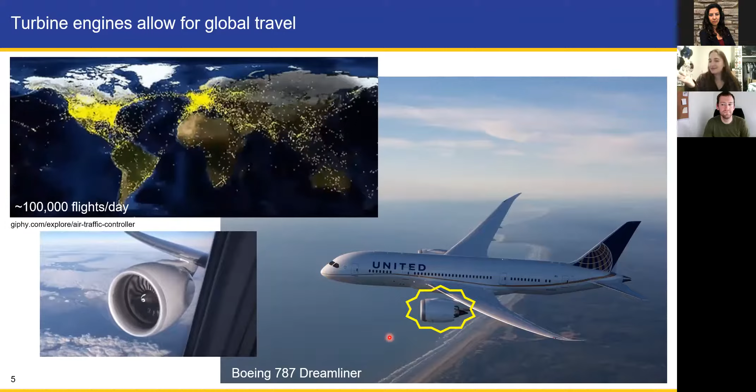What we'll really talk about is this amazing machine called the turbine engine. I first want to talk about how it works, because material science often focuses, especially on these applications, on very small parts within a larger system. So I usually talk to my family and people about what I do, and I start with the turbine engine.

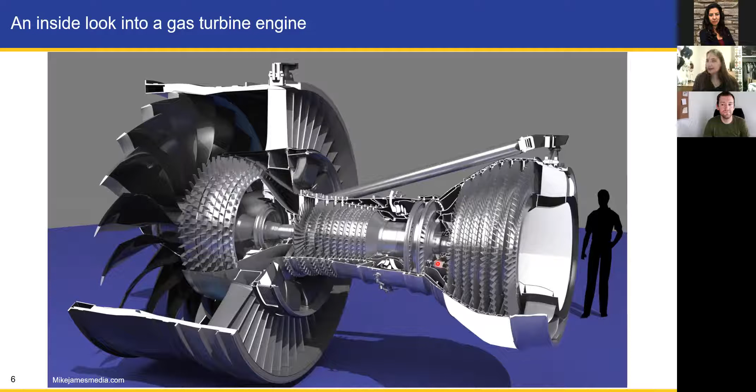So let's take a look at the inside of a turbine engine. Here's a person for reference. We're going to break down how it works just because I think it's really interesting. I focus on materials towards the back of the engine here. You can see there's lots of components that are very complex inside this engine. So if we take this and expand it so we can talk about each part of the turbine engine...

The first is the main fan, and the fan blades suck in air from the environment. The air can bypass the core, which consists of the rest of these components, or it can go through the core. The air coming through the main fan provides most of the thrust that's needed to get you up in the air.

The air that gets through the core first goes through the compressors, and it's squeezed as it passes through the low pressure compressor and into the high pressure compressor. Then it enters the combustor where the compressed air is combined with jet fuel and you get a combustion process. And finally, hot exhaust gases blow out the back of the engine.

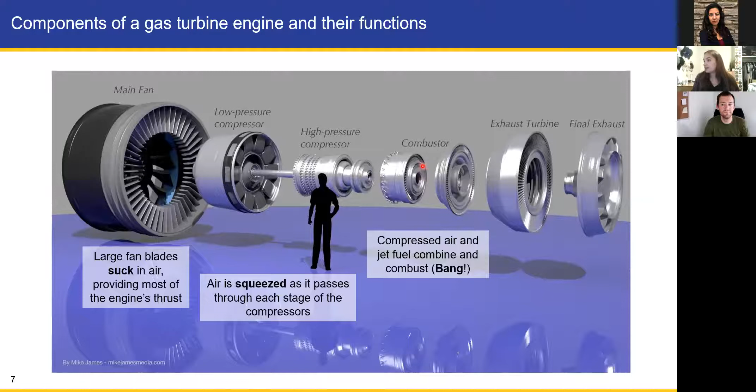And the hot gases cause these turbines to spin. Everything is connected to one axis. So as these turbines spin, it allows the front main fan to spin and suck in more air, and the whole process repeats itself. So the materials problem that I focus on is the high temperature materials in the turbine section of the engine.

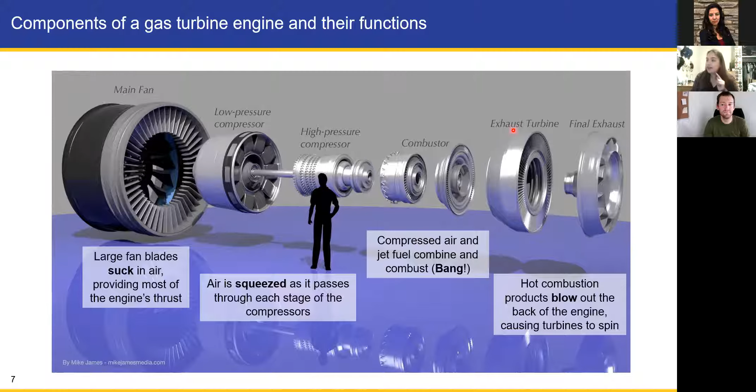So in terms of material science, I focus on three main considerations for material choice in these turbine engines: thermal, mechanical, and chemical configuration environments.

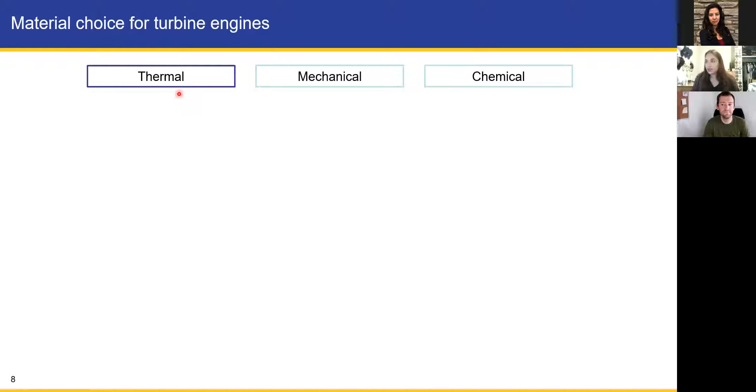So let's start with thermal. We can go back to basic chemistry and talk about bonding. Each type of material has different types of bonding that holds it together. Ceramics often have the strongest bonds, covalent or ionic bonds, where ionic bonding is most popular in ceramic materials. Think about sodium chloride. Metals have metallic bonds, which are the second strongest, and polymer chains are connected with these weaker van der Waals bonds.

So in terms of temperature capability, the materials with weaker bonds often have a lower operating or melting temperature, and materials with stronger bonds have higher melting temperature. So ideally, we would like to have the highest temperature materials, like ceramics, in an engine.

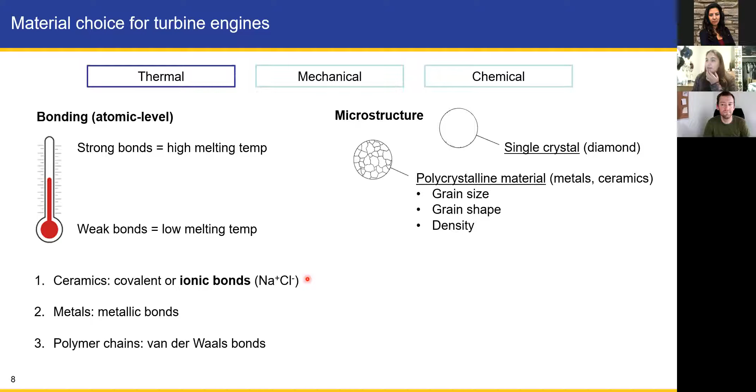Other aspects of the materials that are important to understand is the microstructure, where you can have materials that are single crystal, such as diamond. These are really expensive and difficult to grow as one crystal, but they often have high temperature capability and really good properties.

More common in ceramics and metals are polycrystalline materials, where you have a microstructure that looks something like this, where these things here are individual grains. The size and shape of these grains, and the density—whether they're completely compact or whether there's pores—all play a role in the thermal and mechanical properties of your material.

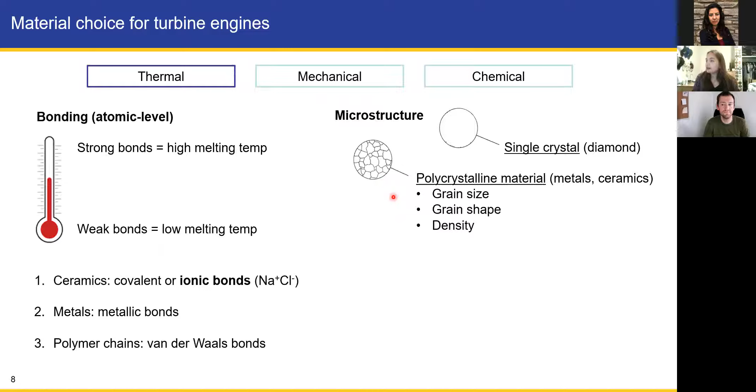So if we think back to our turbine engine, the coolest part of the engine is the fan, so sometimes polymers are used in the composite materials on the fan blades. And the hottest is after the combustion process where the hot gases flow out, so we want metals and ceramics in the combustor and the turbines in the back of the engine.

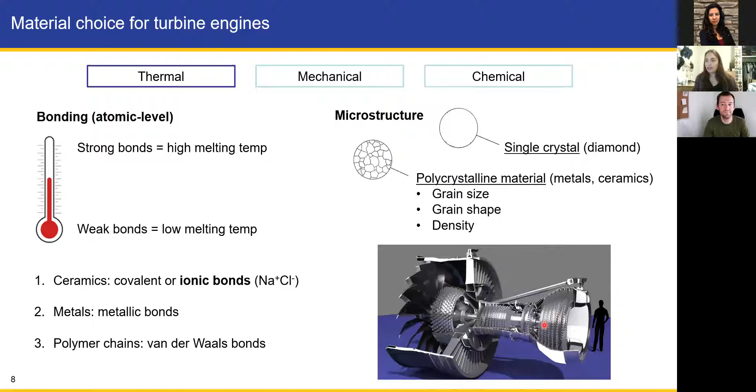In terms of thermal behavior, the goal here is to increase the gas temperatures that we use in the engine, which in turn increases the engine operating efficiency. But over time, in the past 60 years or so, we've been really limited by the material melting temperatures themselves.

So I want to talk through some things that we have done as material scientists to process and create materials to try to increase operating temperatures. The first was done in metals. Common metals used in engines are nickel superalloys.

And so we've tuned the microstructure from these type of grains to directionally solidified grains, where you have elongated grains, to single crystal materials, which increase the engine operating temperatures.

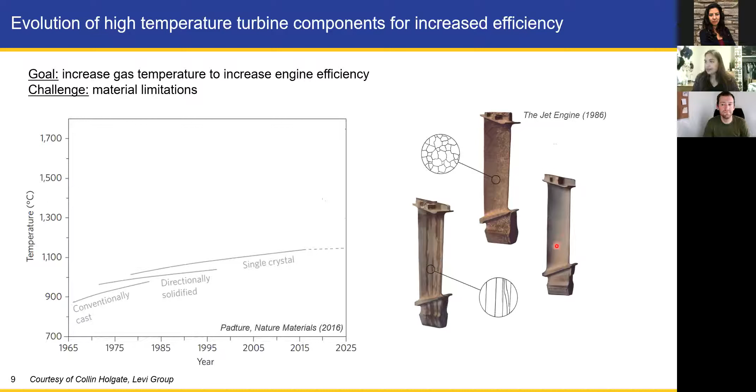We have engineered some ceramic coatings that go on top of the metals that have a low thermal conductivity, so that the hot gases interact with the ceramic with high melting temperature and don't reach really the bottom of the metal that has a slightly lower melting temperature.

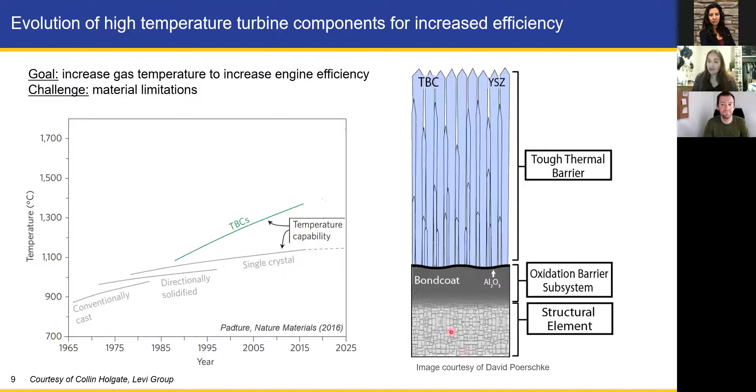Some really incredible feats of engineering are cooling channels that have been placed in these metal materials, as well as coatings that go on top. Tiny holes are machined into these turbine blades, where air, instead of going into the combustion process, is redirected into these materials to cool them down. That unfortunately doesn't help with efficiency, but it's kind of incredible when you think about how these things are made.

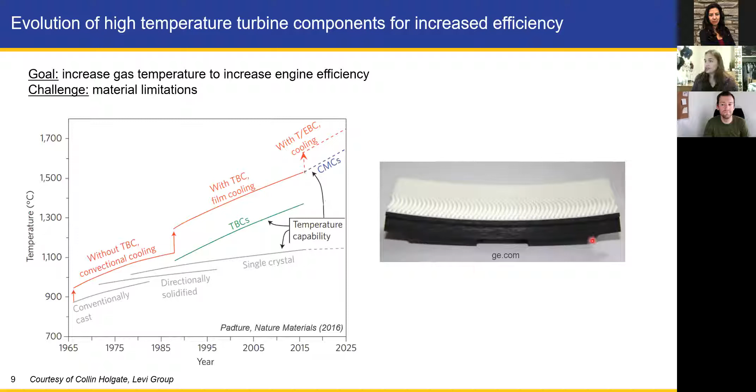And finally, what I'll talk about today is moving from metal materials to ceramics. This picture here is a picture of a turbine shroud. It lines the outside of the turbines, and it's made of ceramic materials—these are ceramic composites, and the white on top is a coating.

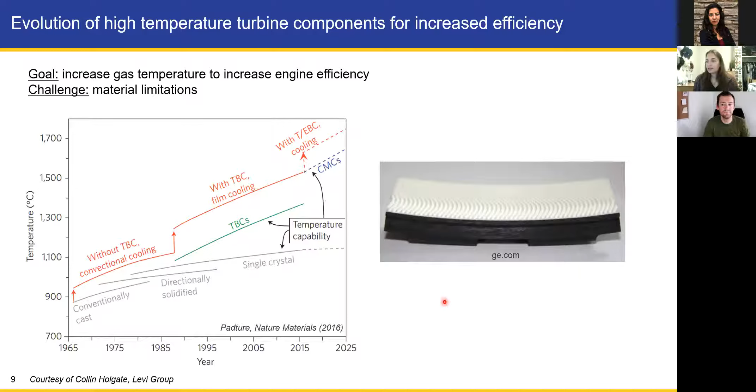Now, ceramics, we have to think about, as well as metals, the mechanical response in an engine. These things are rotating, there's gases flowing, we're going up in the air and down again, so pressure is changing. So we really need to test these materials.

So what we do is test simplified specimen geometries in a tensile test. This is just an example of a machine that you may see in mechanical testing labs, where we grip the specimen on both ends and we pull it.

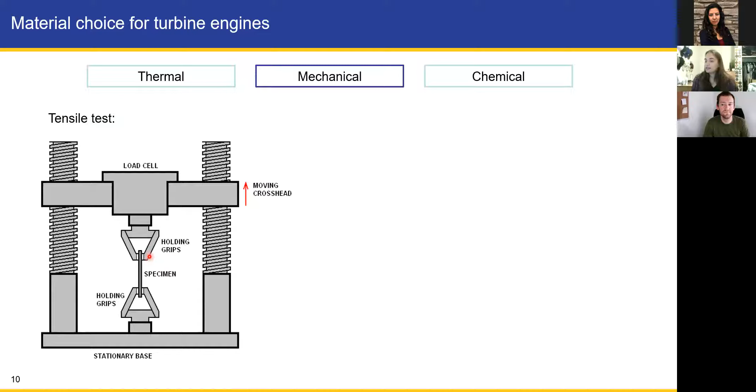So what we get is a force displacement curve, where we measure with this load cell the force on the specimen, and with this moving crosshead, the displacement of how far we're stretching it.

So if we're thinking about high temperature materials of ceramics and metals, ceramics are generally strong, so you can pull them to high forces, but they're brittle, meaning you can't pull them very far before they break. And metals are ductile, so they don't have as high strength as ceramics, but you can really stretch them and bend them and form them before they break.

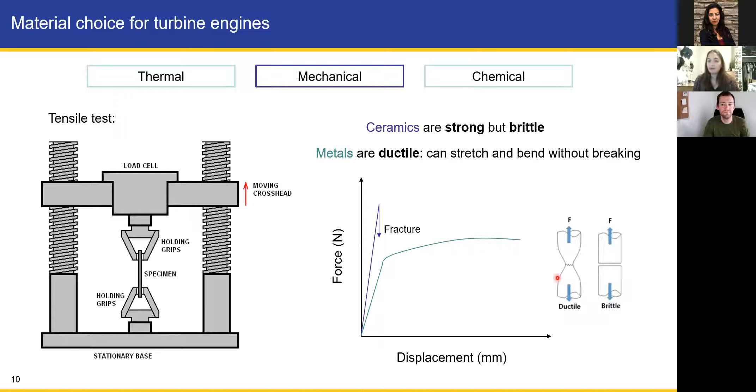And the last consideration is chemical. So like I mentioned, the hottest sections are in the combustor and the turbines. During the combustion process, the fuel is mixed with air to form some exhaust gases, which can be carbon dioxide, water vapor, nitrogen, and oxygen.

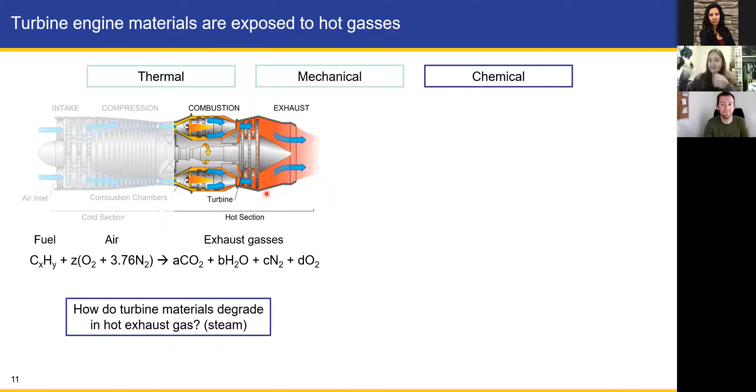And what I'm particularly interested in is how these new turbine materials degrade in very hot steam environments. So the testing that we do in the lab is a little bit different. Sometimes NASA or these companies that create the engine parts have test engines that you can place your materials in and actually go through the combustion process. But on a lab scale, we have to make do with simplified testing.

So what I do is I use a tube furnace where I put my material in a ceramic tube on a boat, and I introduce air or water vapor into my materials, and I can control temperature with these heating coils. And then I use a microscope to look at the changes of the microstructure before and after exposure.

You can also combine the environmental exposure with mechanical testing. So this is a sample that you can pull in a tension test and also introduce the water vapor and steam into a furnace that wraps around the sample. Really fun experiments, I think. Maybe I'm biased, but you're really trying to break this thing and see what's going on.

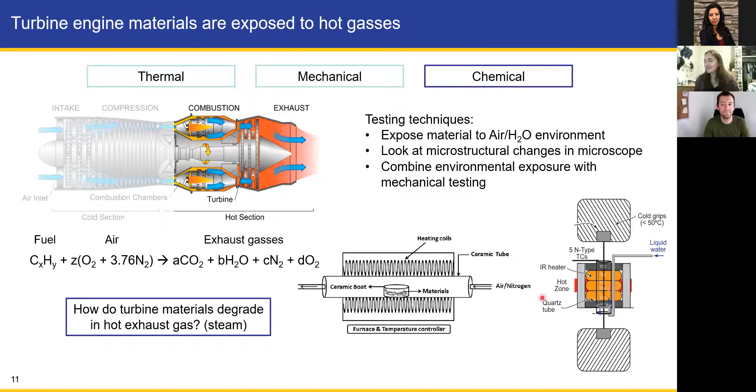So we talked about a lot of aspects of these turbine engines and the research that goes on. I just wanted to quickly plug the structural materials department, because UCSB is really the academic center of turbine materials research in the country, possibly in the world. So I just wanted to plug a little bit more of the research that goes on that I won't get to talk about, but if you're really interested, you can head to the materials website and check out some of the faculty. They have lots of things on their websites.

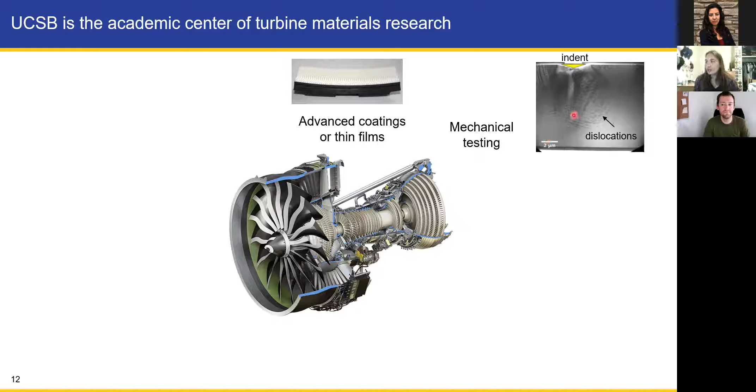So I mentioned these coatings. A lot of research goes into fabricating coatings to protect these metals and ceramic materials. A lot of mechanical testing is done on the macro scale when you're breaking samples in a tension test, but also at a very small scale that another speaker later on will talk about, in these things called dislocations. Microstructure evolution - when materials are heat treated, the microstructure may change, and so people study that. We have amazing characterization facilities that we all share in terms of microscopes and other things.

I'm going to talk a little bit about oxidation and environmental degradation. So there's a lot of research not only in exposing materials to water vapor, but when you fly over a volcano or a desert, hot sands, dust, volcanic ash gets sucked into the engines and degrade your materials. So that's a whole nother field of research. Additive manufacturing has been really big, especially in metals, in reducing the amount of parts that you need to put together.

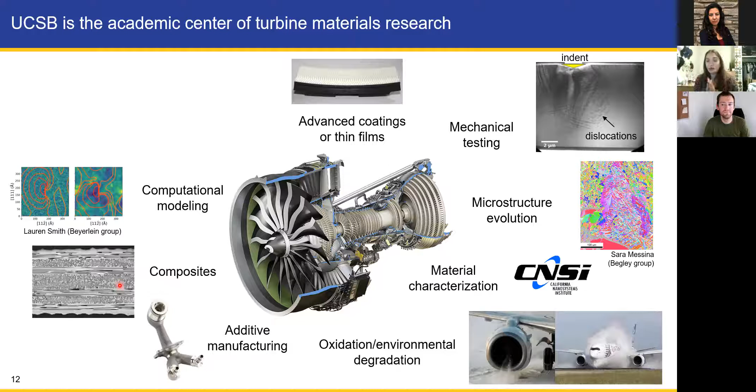Composites, which is what we'll talk about today, not only testing them but creating them, fabrication. Computational modeling is really important, and often we have coupled projects where we have an experimentalist that works with the modeling person, so that is true for my work as well. And finally, high temperature alloys - we're not completely moving towards ceramics, there's still a lot of research in creating new alloys that have higher temperature capability than the current systems right now.

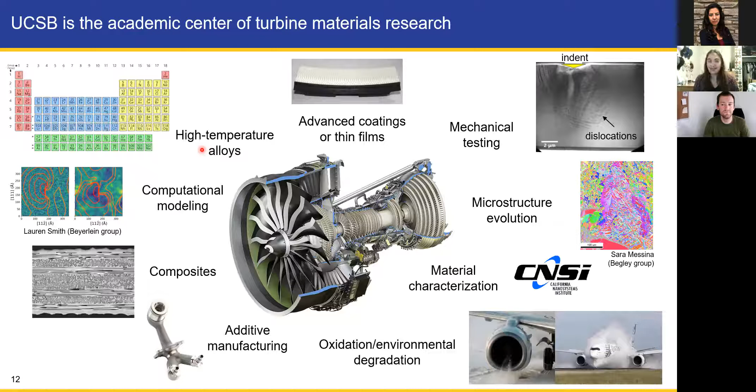Okay, so let's jump into a little bit about my research and the ceramic composites. So Pat mentioned last week a little bit about composites in the polymer space. Now I want to talk about composites in ceramics. In this case, we're combining two or more dissimilar materials for enhanced properties. And what we want is the high temperature capability that ceramics provide, but we really need strength and ductility, which individual ceramics do not give us.

So this is a picture of a ceramic composite. Often they're called ceramic matrix composites because it's a ceramic in a ceramic. You can also have metals and ceramics that are in one composite, but in this case, all ceramic for high temperature capability. We have fibers here, these circular things, in two different directions. Sometimes they're in three directions just to give strength to the material.

Let's zoom in and break down the constituents that make up this composite. First is the silicon carbide fiber. These fibers are very high strength, and they govern the entire composite strength. So that's what gives it strength here.

The second is a boron nitride coating that surrounds the fibers. It's designed to be a weak interface so that when cracks come in, it deflects around the fibers rather than cracking straight through the fibers, keeps them intact, and it enables the ductility of the composite. And finally, our silicon carbide matrix provides structure, protects fibers and coatings from the environment, which we'll talk about soon.

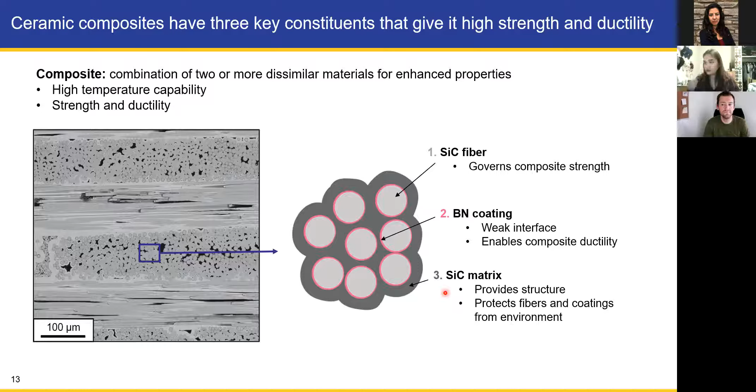Okay, so in terms of the mechanical behavior, which is what we introduced before in our force displacement curves, we can also create stress and strain curves. What we get before, as a reminder for monolithic ceramics, is very brittle failure. So this linear regime, and then we break at very low displacements or strains. But these composites are so interesting because you can see the ductility that they have compared to regular ceramics.

So what happens is cracks are introduced into the matrix, and these cracks deflect around those really important coatings, and it keeps the fibers intact. So that allows us to increase our forces and stresses. What the fibers do is they start to break and they can slide out of the matrix. And then when it finally fails, you get this really cool fracture surface where you have fibers that have been pulled out of the matrix.

And that's what you see here. So this kind of messy fracture surface is exactly what we want to see, rather than a very flat, brittle failure that normal ceramics have.

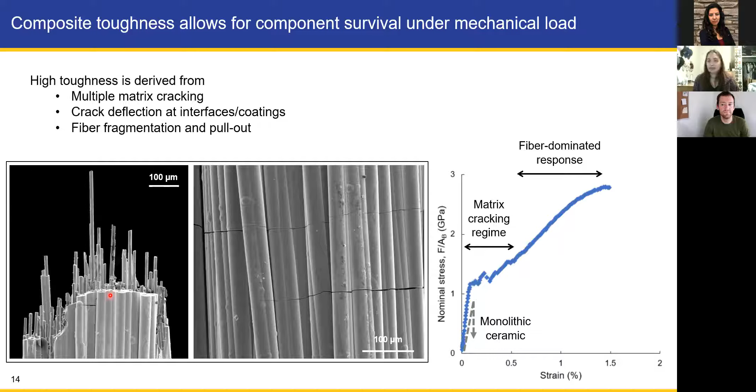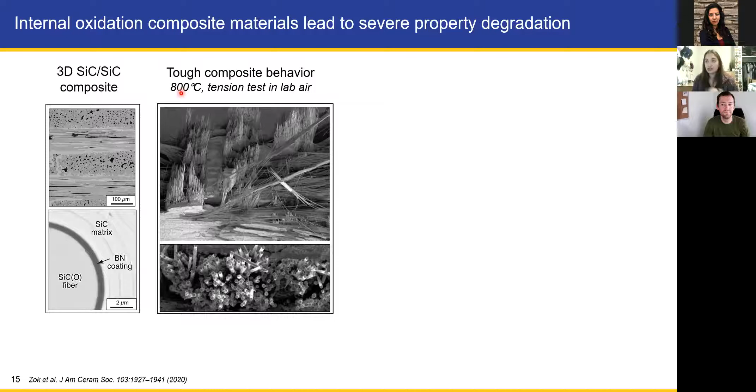This sample was tested in a tension test at 800 degrees C, just in the lab air. But when we expose these materials to water vapor environments to try to simulate the exhaust gas, we get some complex behavior. So some of these fibers show brittle failure, where we have very flat fracture surfaces, like you can see here. Some of them seem to be unaffected by the water vapor and have tough behavior.

And this one was exposed to cyclic loading. So you pull and release the load, and it failed just under 4 hours. And these materials really need to survive tens of thousands of hours in an engine environment. So we need to figure out what's happening.

And if you take a closer look at the microstructure in the SEM, you see new species start to form, particularly around those really important boron nitride coatings. So we want to figure out what is happening when water vapor is introduced. But this picture, like I mentioned, is a little bit too complex to understand what's going on because we get such different behavior just within the same sample.

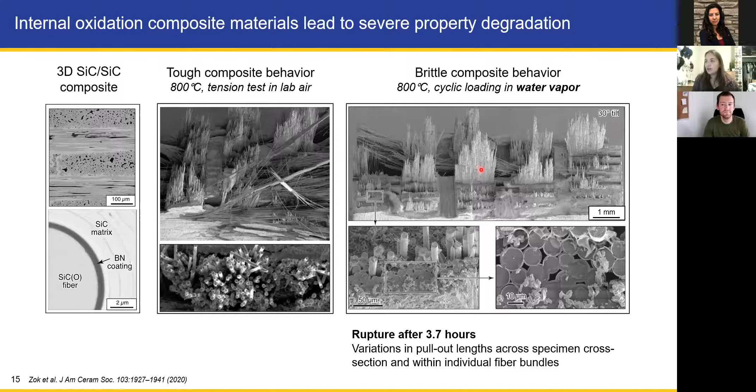So what I do is I break down that multi-directional composite and I study very simplified geometries. So this is a mini composite that has just about 500 fibers in one direction. So I study the microstructural evolution of those when they're exposed to water vapor. And then I also study just the coatings on the fibers themselves and just the fibers. So I'm trying to break it down and understand the more fundamental mechanisms behind the formation of those new species and the timescales over which they form.

And eventually, all of the information that I learned at this level, this length scale, will be used to inform the testing. This is an airfoil that's used in an engine. And designers can use the timescales that we learn about these oxidation processes to determine when they need to repair parts or when they should be replaced before they catastrophically fail.

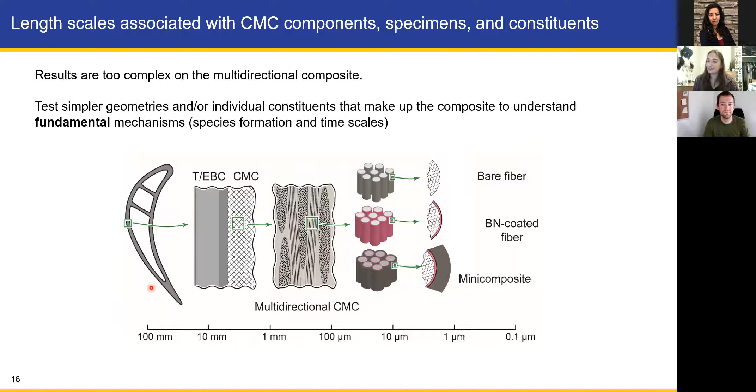So in aerospace, there's no room for failure, because if a material fails in your engine, you're going down and people's lives are at stake. So really understanding these mechanisms are important in this industry specifically.

So I want to thank you guys for listening. Just a quick summary: working hard, asking questions, and making friends got me to grad school and is continuing to help my work-life balance and mental health.

We learned about jet engine operation and engine materials in thermal, chemical, and mechanical environments. And I told you a little bit about my PhD research in understanding the fundamental mechanism behind composite degradation in water vapor.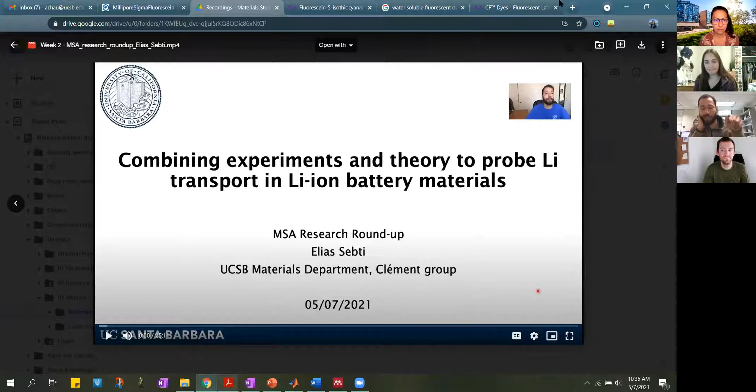I'll say one quick comment—I made a mistake at one point saying research. I meant outreach. You'll catch it, but I meant outreach.

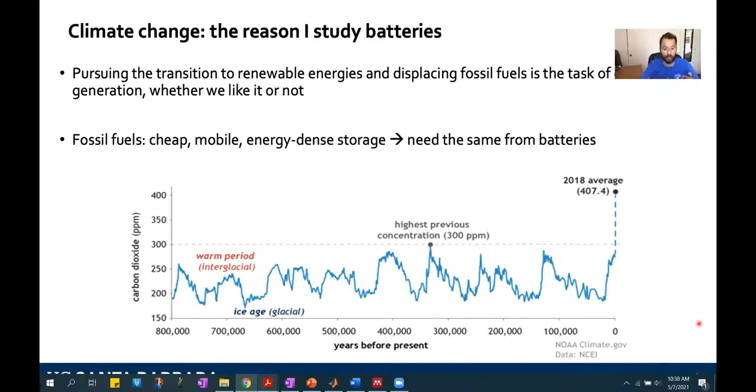I study batteries because I believe that climate change is the biggest challenge, whether we like it or not, for our generation. We have to pursue a transition to renewable energies, and we have to get rid of fossil fuels. Fossil fuels are great. They're cheap, mobile, energy dense, and there's a reason we've been using them for so long. But we've realized now how much CO2 is generated from our use of them, and we need to build batteries that can compete with the fossil fuels and ultimately displace them from the market by making them cheap, mobile, and also energy dense.

In 2017, I got my first opportunity to do research on batteries in Dr. Vince Battaglia's lab at Lawrence Berkeley National Lab. I got the opportunity by really emailing a lot of people, sending out emails to all the faculty at UC Berkeley who were working on batteries, but also a lot of the individuals, the staff scientists working at Lawrence Berkeley National Lab. And ultimately, Vince was nice enough to take me into his group.

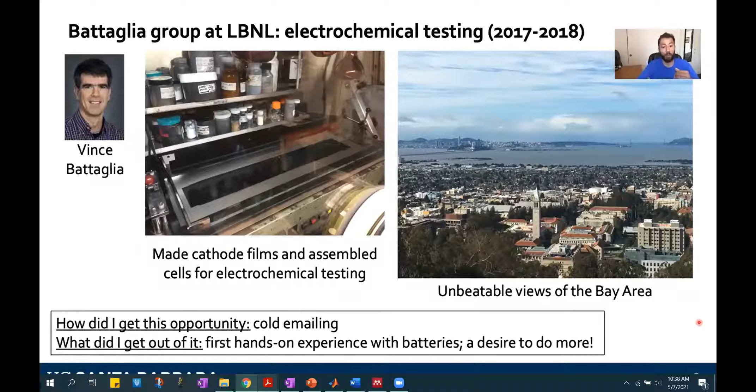I worked on making cathode films, and then I made those films into batteries that I could then test. I got a lot out of the experience, really my first-hand hands-on experience with batteries. I also got some pretty unbeatable views of the Bay Area, if I might say so myself. But more importantly, I really had a desire to keep doing battery research. I knew that there was so much still to learn, and I wanted to learn more.

So in the next summer, I worked with Dr. Mike Toney at SLAC, which is the national lab associated with Stanford. And I got the opportunity basically by reaching out to him and getting funded through the Department of Energy Science Undergraduate Laboratory Internship Program. So we worked at a synchrotron, which is really just a really huge ring of accelerated electrons. And as they move through this ring and pass through bending magnets and undulator magnets, they generate really intense X-rays.

And so these are some of the most intense sources of X-rays that exist on this planet. Traditional X-ray tube sources that you might find in a lab are under 10 to the 10th order levels of brilliance, whereas the synchrotrons are on the order of 10 to the 20th. So they're really way more intense, and they're really impressive characterization tools.

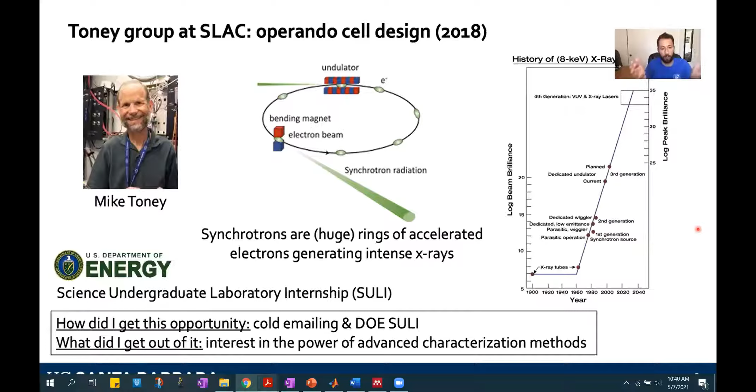So I worked on a project that was on anode-free lithium metal batteries, which are basically just batteries where all the lithium is coming from the cathode and then is plated and stripped from the copper current collector. I was making batteries in order to allow them to be characterized operando in a synchrotron, which means basically using that X-ray beam during the operation of the battery to understand what's happening on the inside. So I really got very interested in the power of advanced characterization methods through this opportunity.

But I also realized that I only had really seen academic research up to this point. And so I was interested in an industrial perspective. So I went to the Subban group at Lawrence Berkeley National Lab that had a collaboration with the Robert Bosch Corporation. I found out about this opportunity through a mass email through the Cal Material Science Department.

And I got to work on this project that was concerned with using sodium ion batteries to do desalination. So just as how sodium would be put into and pulled out from, which we call intercalation and deintercalation, from a sodium ion battery cathode, we can do the same with sodium that's in water. And on the other side, get chloride to adsorb to the surface of a very high surface area carbon material. And in the process, we can pull sodium chloride out of the water.

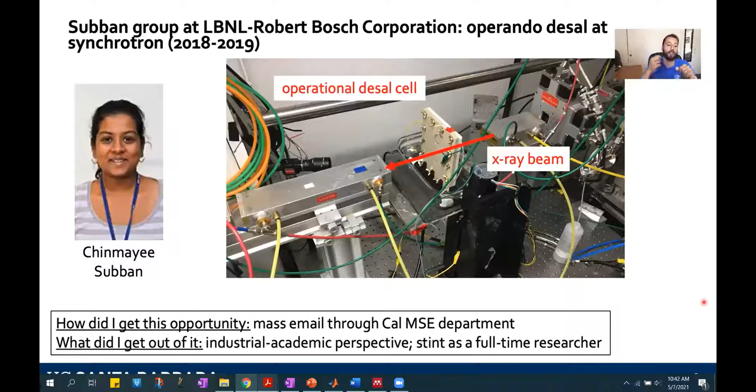In that opportunity, I also got to spend time as a full-time researcher, and I really appreciated that because it gave me insight into what graduate school would be like. I realized I wanted to keep going with my education. I wanted to keep learning, and I also didn't want to go into industry, start making money, and then have to go back to graduate school where I'd be making less money.

So I decided to apply straight to graduate school. I knew I wanted a hands-on research advisor based on my previous experiences, especially with Dr. Subban, and I knew that was hand in hand with a newer research group. So I found Professor Raphaële Clément's group at UCSB, which also had an emphasis on characterization and electrochemistry. Their goal, and our goal now, is to elucidate structure-property relationships in electrochemical materials.

I got to talking to her, and unfortunately in that instance, I knew I would have to bring my own funding to be able to attend. I was admitted to another school, but UCSB was still very tantalizing for me.

So I applied to the National Science Foundation Graduate Research Fellowship, a 5-year fellowship program with 3 years of full financial support for your endeavors. It's a program that requires just 2 components to the application: a personal statement and a research proposal.

That research proposal is a great thing to work on with mentors you've had over time, because it's crucial to spend time understanding the current state of science, which is really where mentors can help you, and also design experiments to learn new things to advance a certain field. Now, you don't need a fellowship to go to graduate school, but it can really open a lot of doors. In this instance, UCSB was one door that I would need a fellowship to open.

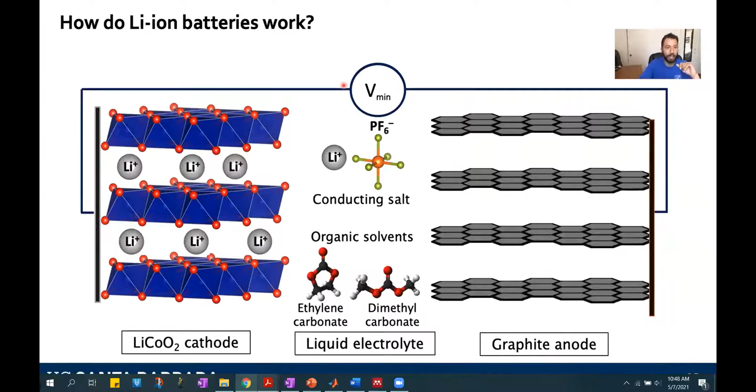This liquid electrolyte unfortunately has some pretty severe limitations. They're made up of organic solvents like ethylene carbonate and dimethyl carbonate, as well as that conducting salt, lithium PF6. One limitation is that the voltage range of stability of the organic solvents, as well as their temperature stability, is pretty limited, because they tend to break down at higher voltages or volatilize at higher temperatures.

On the other side is the flammability concern. If you've seen videos of Teslas on fire on the side of the highway, or the whole Samsung Note fiasco, that's because the organic solvents were catching fire. Next, as the organic solvents break down, they can create insulating films on your electrodes, which increase resistance and lower the capacity you're able to extract from your battery.

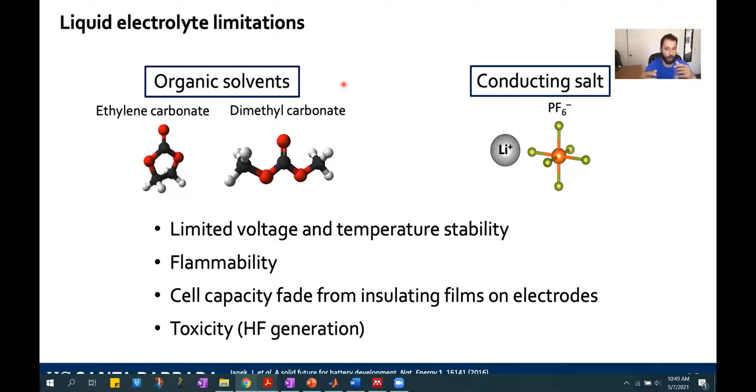Finally, from the conducting salt, there's its toxicity. The fluoride anions it contains can, when mixed with water or air, start to create hydrogen fluoride, which is a really, really dangerous chemical.

So one thing we can envision is moving away from these liquid electrolytes towards a solid. Our battery architecture would then look like a cathode composite, composed of our active material and electronically conductive carbon additive, as well as a solid electrolyte. It's this solid electrolyte that we're going to pay a lot of attention to today—it also acts as a barrier between our lithium metal anode and our cathode.

On the solid electrolyte advantages side, we've got a huge energy density increase possible by allowing us to go to higher voltages and implement a lithium metal anode into our construction. These are really what we're shooting for—we want high energy density if we want to displace fossil fuels. Next is non-flammability: the solid electrolyte is non-flammable and will not catch fire. It's also stable, so it won't become volatile at higher temperatures, meaning our battery doesn't have to worry about being at those higher temperatures.

Finally, battery stacks become possible. In a liquid electrolyte, we have to individually package every cell because we don't want liquid leaking out. Here we have no liquid, so no leaks are possible, which means we can layer batteries on top of one another for more module-level energy density. Now we need certain properties from these solid electrolyte materials, the first being high voltage stability, meaning we want chemical stability against both our cathode side and our lithium metal anode side.

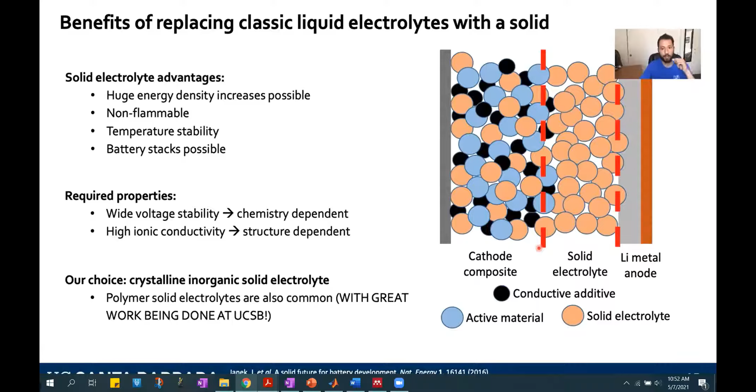So on the menu today, we're going to be looking at layered lithium yttrium chloride and its stacking faults that affect its conductivity. But first, let's talk about crystal structure.

Let's consider this layered cake to be a crystal structure. We can tell it's made up of a few series of repeating layers: first our cake layer, then our cream layer, then our strawberry layer. And we can tell that's the individual repeat unit of our cake.

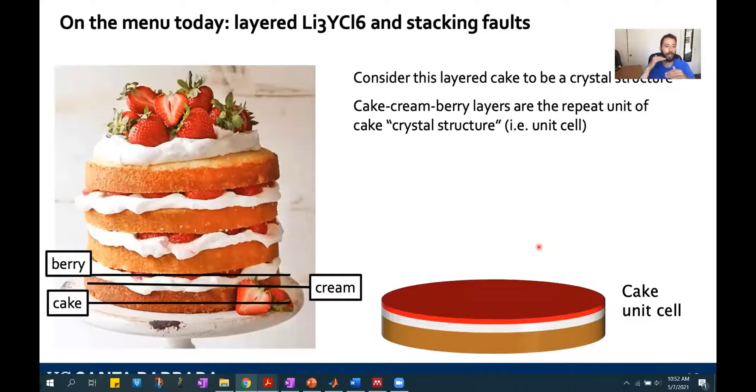That repeat unit we call a unit cell. This unit cell is made up of a layer of cake, a layer of cream, and a layer of strawberries. Then we can start adding layers and create our full crystal structure.

At the same time, if we make a mistake in a layer, if a layer is misaligned or we accidentally switch the strawberry and cream layer, these are called stacking faults.

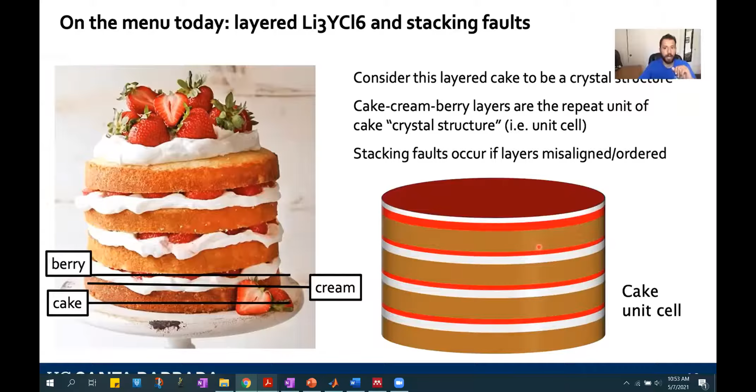Now we're going to focus on lithium yttrium chloride, which is a layered crystal structure. It's made up of a series of 4 layers where we alternate between lithium and yttrium layers with chlorine. So we build up layer 1, 2, 3, 4, and then repeat with layer 1 stacked directly on top.

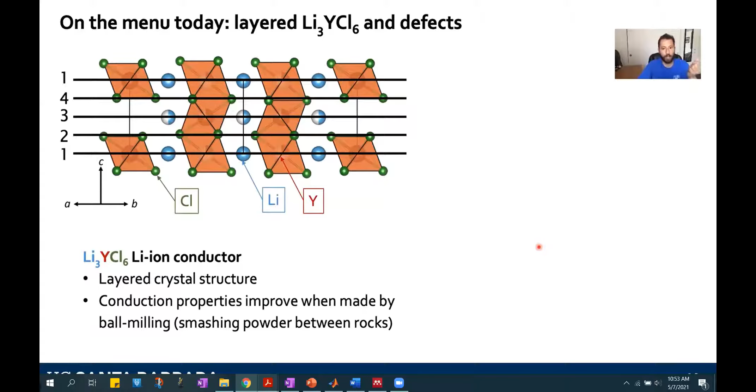This material's conduction properties improve when we make it via ball milling. So there are 2 synthesis techniques we're going to look at today. The first is furnace synthesis, which just means putting it in a really hot furnace.

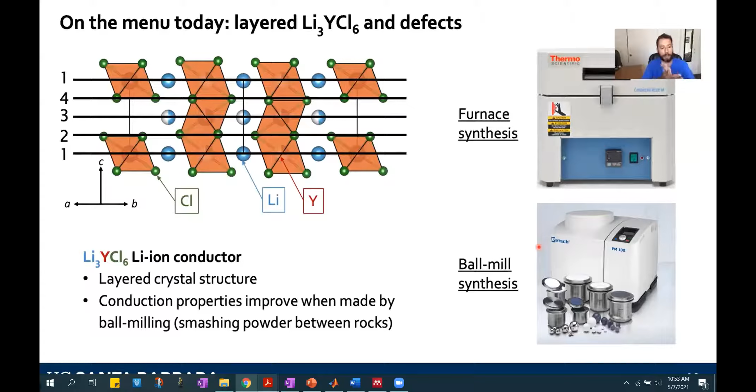The next one is ball mill synthesis, which means I put my powders into little jars with metal or ceramic beads on the inside, and I start spinning it really fast. Basically, I can trigger a chemical reaction by smashing my powder between these rocks.

But really today, I want to talk about how we use characterization tools and theory, and piece these little puzzle pieces together to create this general picture of what's actually happening in a material.

The techniques we're going to look at today include X-ray diffraction to look at the structure, nuclear magnetic resonance to look at what kind of chemical environments or neighborhoods our lithium and yttriums are experiencing. We can also try to understand how fast lithium is moving through our structure with something called pulsed field gradient NMR, which stands for nuclear magnetic resonance.

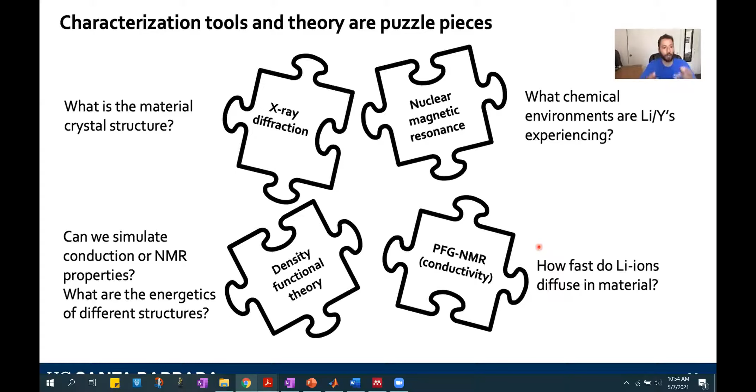And finally, we can try to fully understand everything and run simulation models using density functional theory, which is really just a theoretical approach to try to simulate and understand our different structure models.

So first, we're going to start with X-ray diffraction. X-ray diffraction looks at the average structure of our material, and I want to point to the differences here. Focus on these sets of peaks in the furnace synthesis. We can tell they're pretty sharp on our furnace side, but as soon as we go to our ball mill synthesis, they become really flat and broad, and that's a sign of stacking faults.

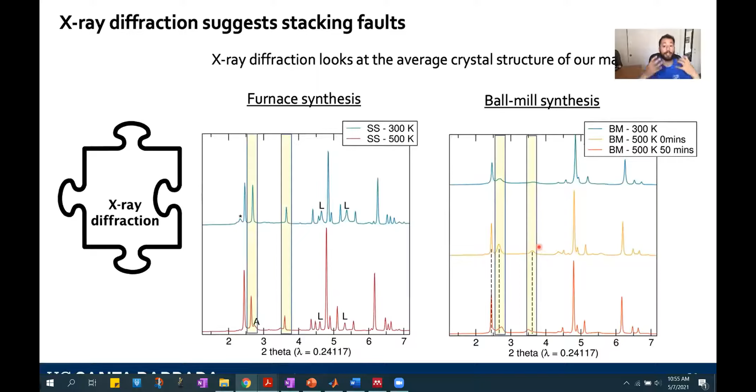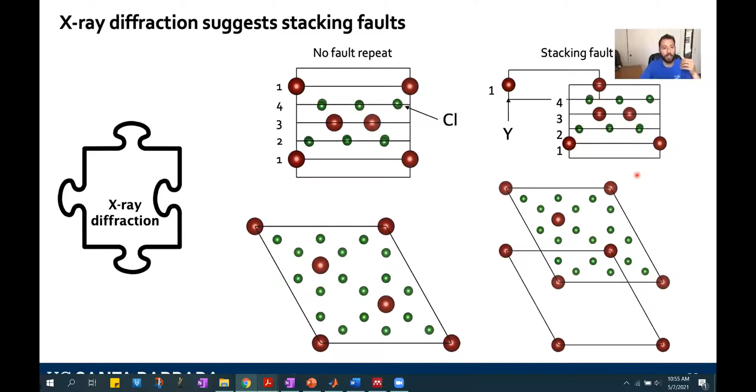As you can see, our crystal structures look pretty much identical. The difference, though, is that when we start conducting through the structure, this different environment is going to cause a lot of differences. So we can start to look to solid state NMR to understand what's happening within.

NMR is a really element specific probe. And when we look at our structure, we can tell that the yttriums with and without stacking faults are going to experience different local environments. They're just different chemical neighborhoods around it. And that should be reflected if we run an NMR experiment.

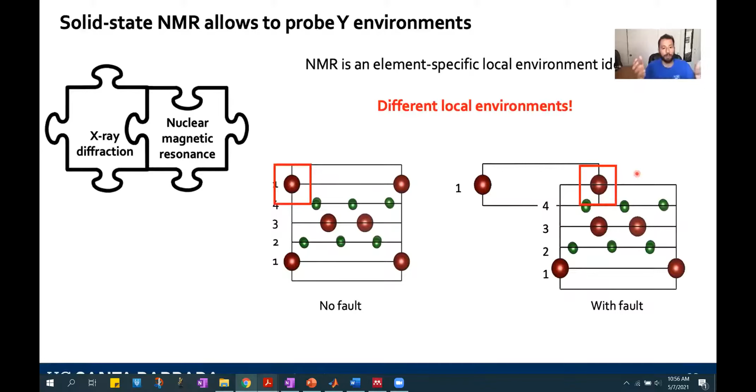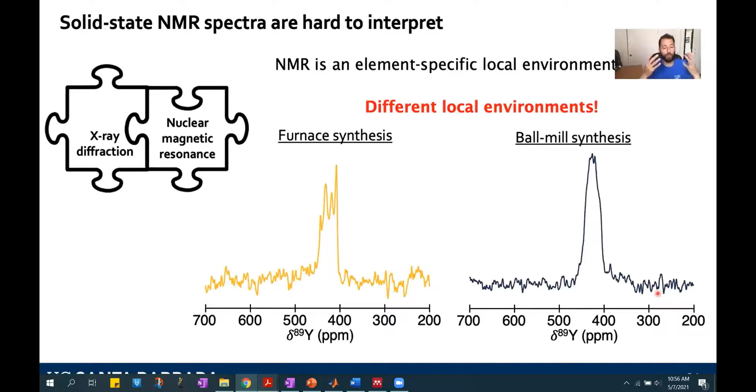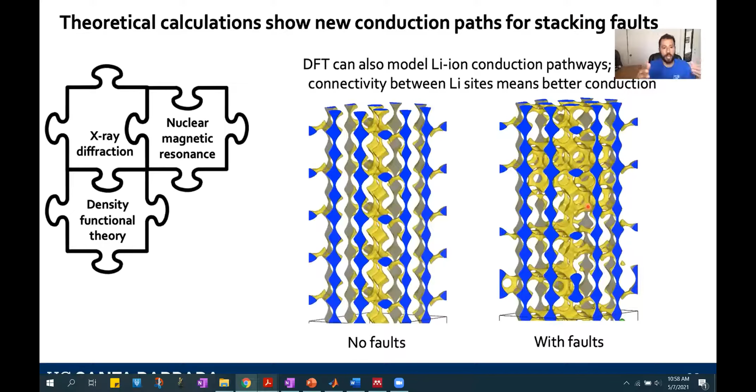But as I introduce the stacking faults, I create these loop features. And these loop features, really what they're doing is they're increasing the connectivity between different lithium sites. In that process of increasing the connectivity, we can start to get much better conduction through our structure.

Next, I move to characterization techniques that allow me to specifically look at conduction. So I use this PFG NMR, or pulsed field gradient NMR, to track lithium conduction as a function of temperature. In the process, I can access activation energies for these conduction processes, which you can think of as how easy is it for me to conduct.

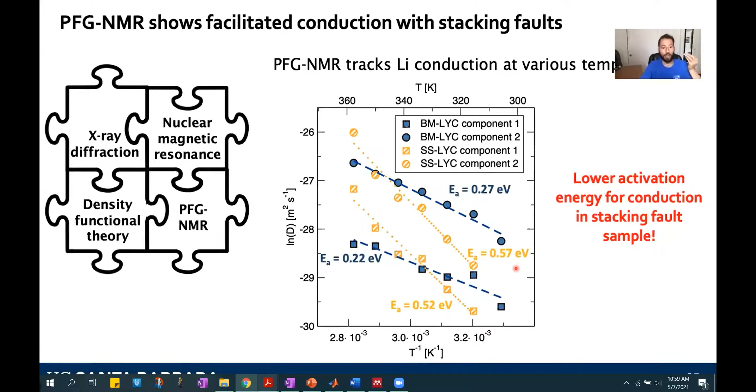And so we've created this full image that lower activation energies are correlated with stacking faults in the material. So I can piece together all these different pieces of the puzzle. I saw from my X-ray diffraction that I had stacking faults. I used NMR to confirm it by looking at the different synthesis techniques. Then I gained an understanding of what my NMR spectrum and conductive properties would be from density functional theory calculations. Finally, I confirmed that in my material with stacking faults, we get easier conduction.

And all of this was done by putting together a lot of different characterization techniques to get a full picture of the material.